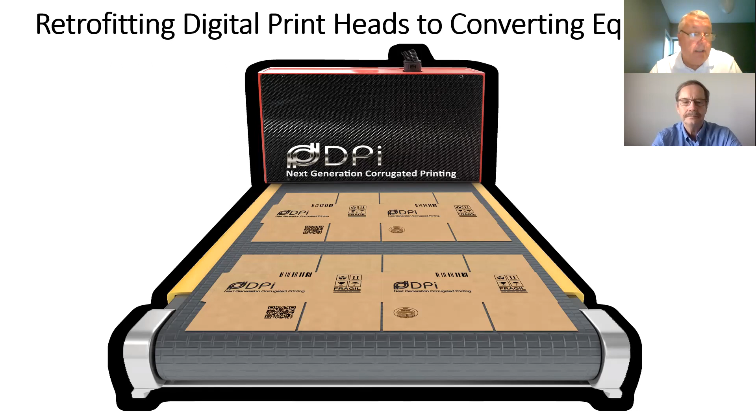Putting inkjet heads on existing converting equipment is not exactly something new to the packaging industry, but it is new to the corrugated industry. My company, Digital Print Incorporated, or DPI, has been the first to bring high-speed digital printing equipment to the corrugated industry - retrofitting it to existing corrugated equipment, whether it be printing equipment or just converting equipment in general, like corrugators. Other packaging industries have been doing it for many years now, and very successfully, but not the corrugated industry.

So what is digital print retrofitting? It's kind of just what it sounds like. It's taking a print head - doesn't have to be one size or another, we can do just about any size you want - and applying it to the inside of an existing piece of equipment, like a die cutter, a flexo folder gluer, a corrugator, or whatnot.

Some of the key aspects of that: it can be made in any width you want. Our smallest head is 4¼ inches, and we've looked at stuff to go over 100 inches wide, so that's not a problem. Our print heads can actually run faster than most corrugated converting equipment - we have stuff that's running up to 1,200 feet a minute.

I'm going to try to put this little video on right now so you can see how fast. If you look at this video, this machine is running at 1,200 feet a minute. It's the fastest flexo folder gluer I've ever seen - more like a folding carton machine - but our machine is keeping up with it. So I'll show you this.

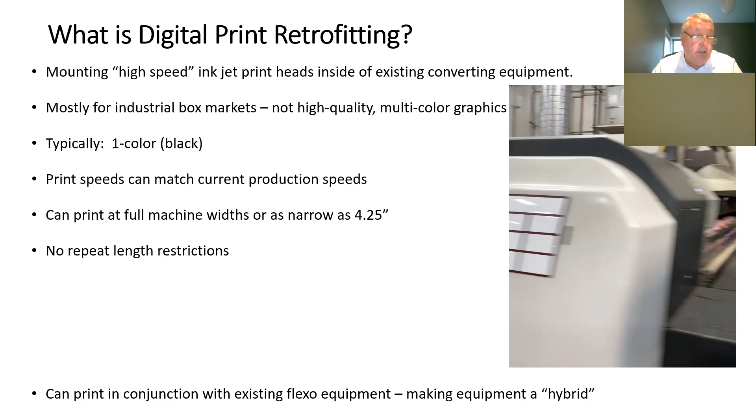And of course, one of the things that is really key to this whole thing is you can print both static information like you do with a flexo, or you can print variable information, which is something that flexo cannot do. So with that, we'll go on.

So why retrofit? Many of you out there may be saying, hey, my flexos run fine, I don't need that. But the one issue I hear nowadays when I go out into the field is how busy everyone is. Everyone is pushing the envelope as far as how much footage or number of boxes they can push out, and they are limited mostly by their capacity to do that work, or the people. So many of you complain, I can't get the people, so I can't expand the number of hours I work, and I can't get more machines because I don't have room in my plant for more machines, or I don't have enough money to buy a $2 million extra flexo or die cutter or whatnot.

This is where digital can help you take what you have and get more out of it. We're doing that by eliminating print setups and wash-ups, eliminating printing plates, and eliminating machine passes for things like double-sided printing, which is becoming more and more popular, or printing on machines that typically don't print, things like flatbed die cutters or folder gluers. If you can eliminate that pass, that's going to give you more time to print as well.

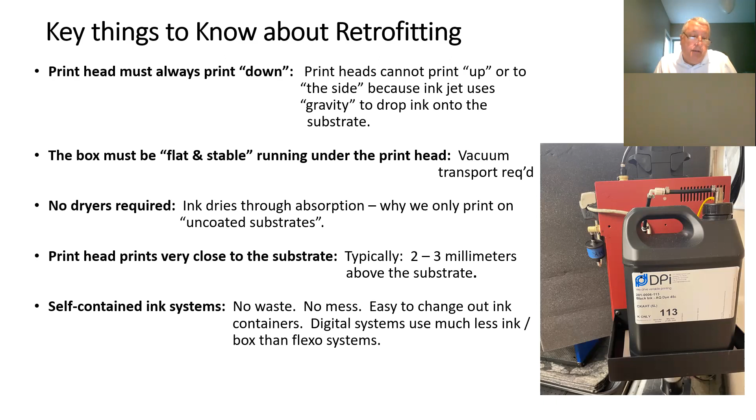So when you compare digital printing ink to flexo ink, a lot of people raise their eyebrows when they hear how much the ink costs in digital versus flexo, and that is absolutely true. On a per liter basis, flexo ink is much cheaper than digital printing ink. But in digital, you put less on, you waste less, and overall the cost per MSF is relatively the same. And then when you factor in all the savings from just running continuously with no plates and no setups, inkjet comes out well ahead. So just think about those things.

So what types of converting machines can be retrofit? Can we retrofit anything? No. But can we retrofit most things? Yes. Top printing flexo equipment, or top printing anything, is really our easiest thing to retrofit.

There's a lot of flexos out there like that. Bottom printing flexo folder gluers can be retrofit, but typically after the box is folded and glued, before it goes into the stacker, and there's usually enough space there to put a printer. The downside is that you only can print on half the box, but it can be done. So if you're doing certain ident work or whatever, that kind of work is certainly open to you even on a bottom printing flexo folder gluer.

Rotary die cutters are typically bottom printers and typically cannot be retrofit for printing on the outside of the box. However, inside the box printing is becoming such a big part of what the corrugated industry is about, that we see a lot of opportunity there. So that would definitely be something that can be retrofit, for printing on the inside of the box in our rotary die cutter.

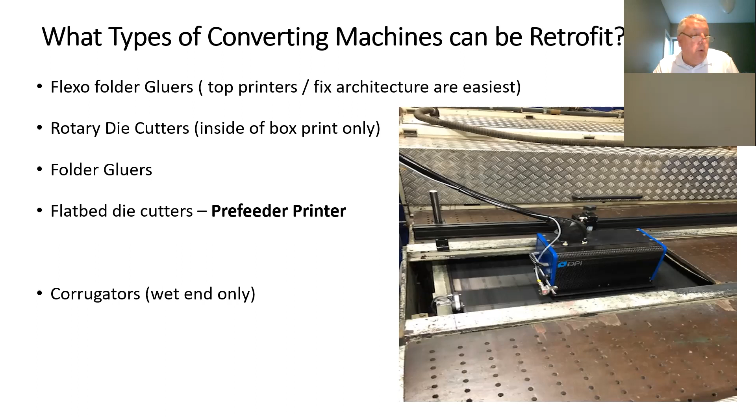But now let's talk about the basic elements of a retrofit system. Obviously you've got the print head, which does the actual printing, and these can be practically any size you want. And then you've got the transom, which is kind of a metal rod that goes across the width of the converting piece of equipment and allows the head to move anywhere along that rail.

Third, you've got a print head mount, which is just like it sounds. It is attached to the print head, and it mounts to the transom on that mount, so it slides side to side and up and down. Then you've got the controller, which is the computer and software that are the brains of the system. And then you've got the cleaning and parking station where a head goes when not printing or is going to be cleaned. That's just a quick overview.

Now let's look at each one individually. So you've got your print head.

Print head. On the left is a 4¼ inch wide print head that was on a flexo folder gluer. It's in a very unique spot on that flexo folder gluer, right before the folding section, so it's held down in place there very nicely.

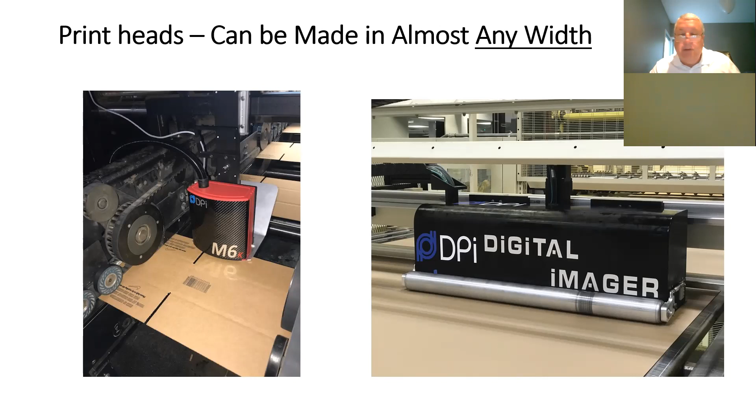So I'll show you this video right now.

So that's basically the concept. A lot of the ones on converting machines like flexo folder gluers and whatnot, we just do those manually because you only have to move them a small distance, and you just lock them into place—it literally takes seconds. On the corrugator, everything is automated. So what you saw there was an automated system.

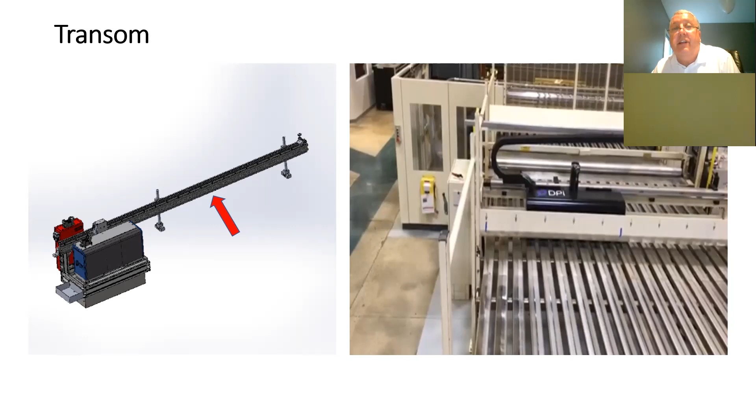Now we're talking about the printhead mount. Again, it's attached to the printhead and then clamps onto the transom, allowing the printhead to move across the transom and then clamp into position at the proper spot on the web. It not only allows it to go side to side, but there are also pneumatics or small motors on this which allow the head to go up or down.

Because when we're out of print position, we're typically an inch or two off of the web, but then when we want to go into print position, we're down 2 to 3 millimeters from the web. So that's how this does that, through the head mount. It's not as simple as it may look—it's a pretty complicated little device. Each of these head mounts is unique to your specific machine that we would retrofit to.

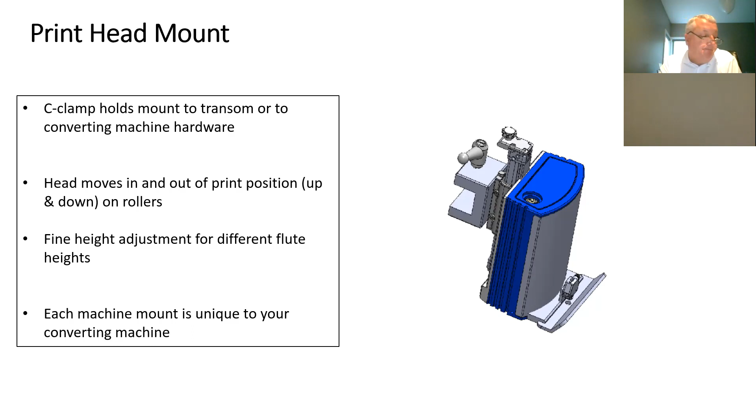Again, the controller is the brains of the system, and it's equipped with a touchscreen operator interface for easy operation. The system is incredibly simple to use, and the software was designed with brown box operators in mind. So those of you out there who might have more sophisticated digital machines know you kind of have to be a color guy sometimes to work them—that is not the case here. This is kind of like off or on, you're in position, go kind of thing. It's very easy to use.

And we have a lot of software that comes with this for things like variable printing and things like that. So it's all incorporated into the software.

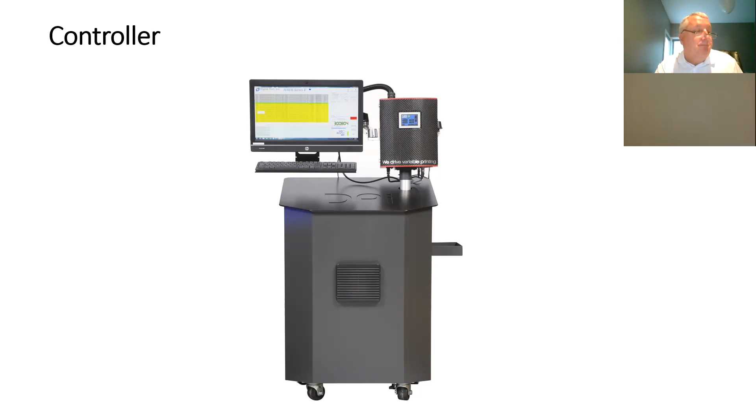Again, on the ones in the smaller heads that sometimes go into things like flexos and whatnot, those are a little more manual, but it still does automatic purges and things like that. Whereas the stuff on the corrugator, there's no hands on it -- it does everything automatically.

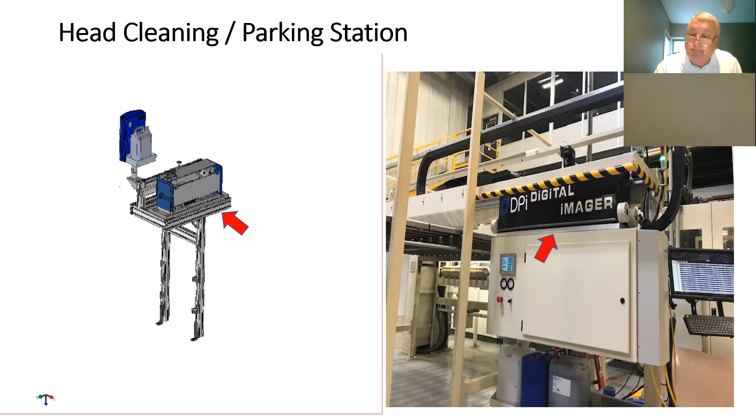That printer is running variable barcodes. I think it was going like 17,000 boxes per hour, and each box is unique -- it's a great story there behind that one.

And this next one is a box company that bought two 4 1/4-inch heads, and each one runs independently. So one might have a cert stamp and an ident, and the other would have a variable barcode on it. What I'm saying is you can print different things on each one -- variable on one, static on another, variable on both, whatever. The software that we have will handle all that.

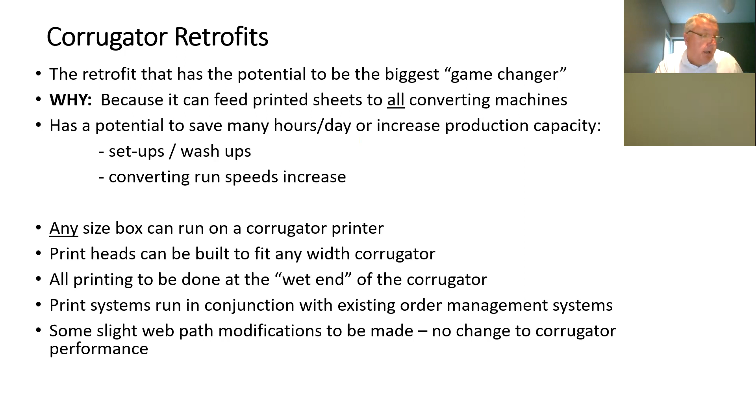This new web path was designed in conjunction with Fosber, a partner of DPI's. If you know how a corrugator works, the liner board comes off the roll with the print side down, upside down. So what we do is turn that web over and allow our print head to print on the outside of the board, then quickly turn it back over before it goes into the double back.

It's relatively simple actually, but until we did it, nobody was sure it would happen. The reality is, web turners in the printing industry—I've seen hundreds of them all over the world, in other industries—but the corrugated industry has never used them. We just took those kinds of designs and applied them to the corrugator, and this is the way it does it, with no effect on performance whatsoever. So that's kind of where we are.

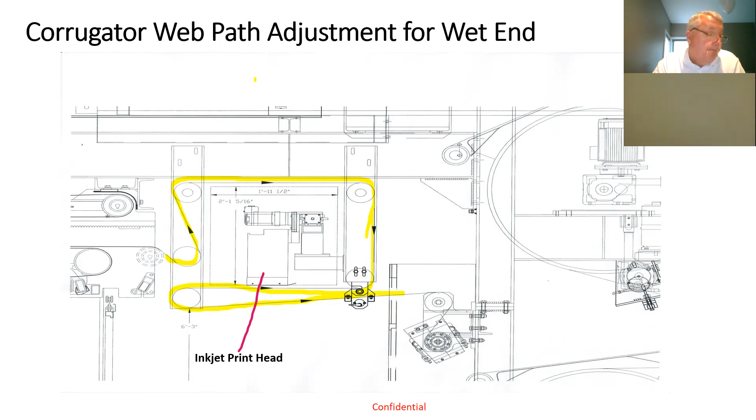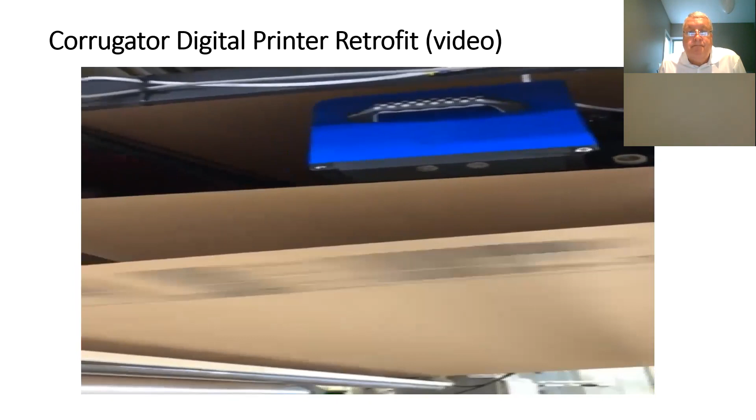It really is cool to watch, especially when it automatically goes from one job to the next. And with a wide printer, the head doesn't have to move around much at all.

If you were wondering how the system registers the print onto the sheets, it's done with cut-to-mark technology at the dry end of the corrugator, which our friends at Fosber have also automated to make it very simple to use. If any of you have ever used cut-to-mark systems on a corrugator in the past with pre-printed liner board, there's a lot of manual work getting the photo eye into place so it can read the cut to mark.

With the new system we've developed, all of that happens automatically. It knows where the print marks are supposed to be, and it goes right to it. So it's a totally integrated system, it all works automatically, and you really don't have to touch it. It's awesome.